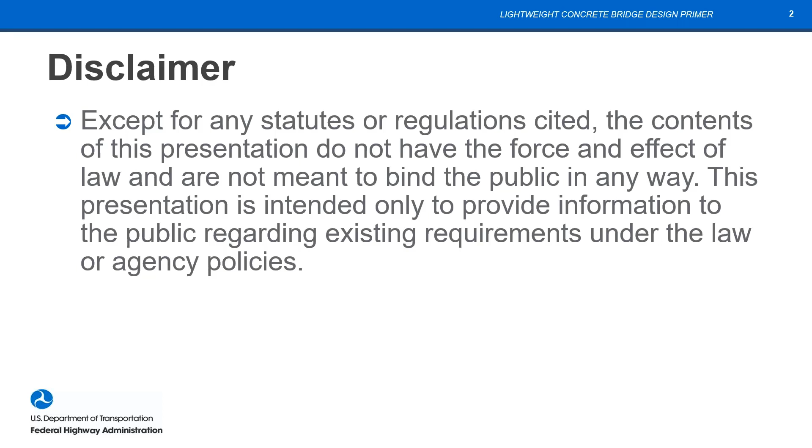Now I'll begin with a brief introduction to lightweight aggregate and lightweight concrete. Structural lightweight aggregate has been manufactured commercially in the United States since 1920. It started out a few years earlier than that, when a patent was obtained for it. So it's not a new material, though lots of us think of it as a new material.

They immediately began using lightweight aggregate as it became available to make structural lightweight concrete, and it was used in bridges. An early application was the San Francisco-Oakland Bay Bridge. The upper deck of that suspension bridge was lightweight concrete, and I'll talk more about that in a few minutes.

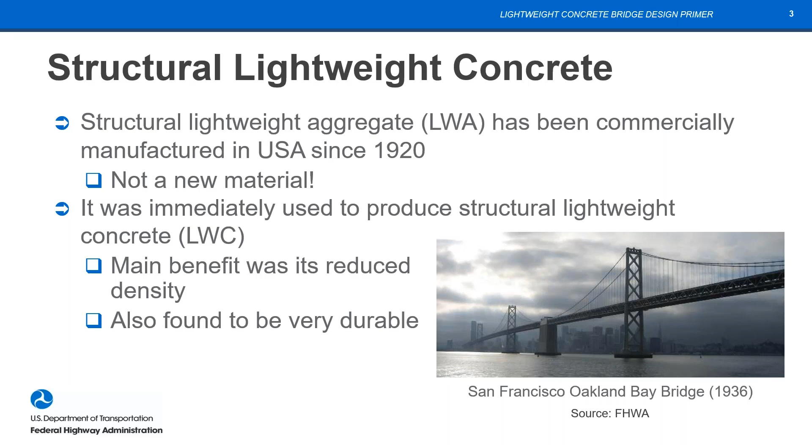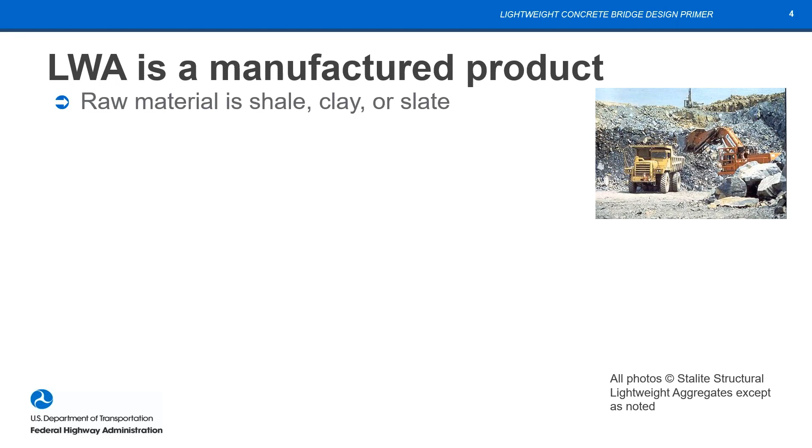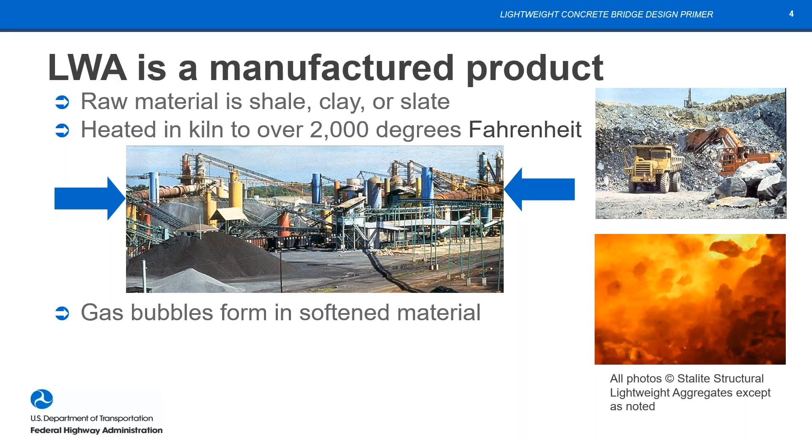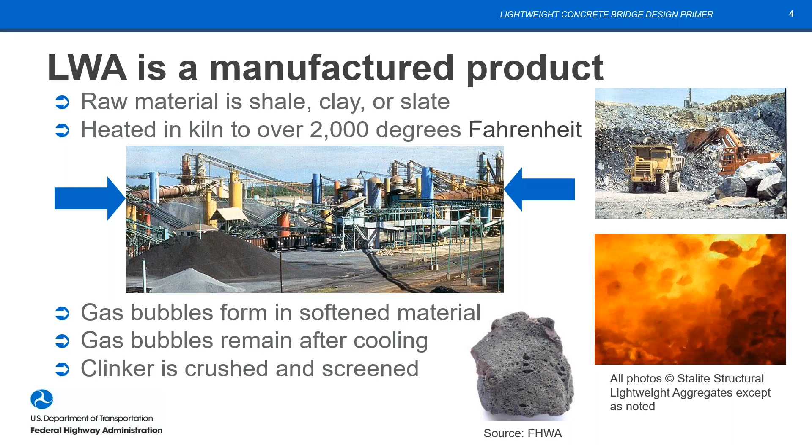In those kilns, the heat is fed in at the bottom, raw materials at the top. The material gets soft as it gets down to the bottom. We don't melt it, but it's softened. It turns red hot, and gas bubbles are evolved within that material. As the material comes out of the kiln, it's cooled, the gas bubbles remain, and the clinker is then crushed and screened. There are a few other sources of lightweight aggregate available, but my discussion is limited to lightweight aggregates produced using this method, using rotary kilns.

So just about everybody listening to this is probably closer to a lightweight aggregate source than these folks were. A number of years ago, FHWA recognized there was promise in using lightweight concrete for bridges. They felt it could improve the economy and durability of bridges. So one of the strategies they came up with to advance the use of lightweight concrete was to develop a lightweight concrete bridge design primer.

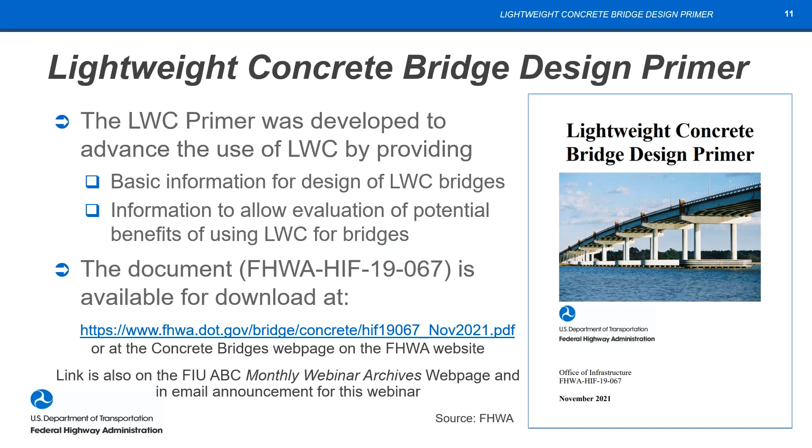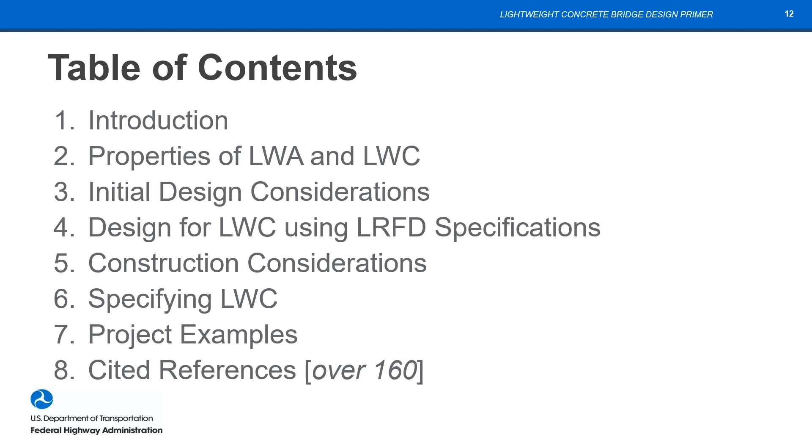As we get into what is lightweight concrete and lightweight aggregate, this is from chapter 1 of the primer. Lightweight concrete is defined in the LRFD. The definition is simply a concrete mixture that contains lightweight aggregate, and it has an equilibrium density not exceeding 135 pounds a cubic foot.

The term equilibrium density is maybe not familiar to some folks. The definition in ASTM is that it's the density of structural lightweight concrete after exposure to relative humidity of 50% and a temperature of 23 degrees C, room temperature, for a period of time sufficient to reach constant mass. What it's talking about is that lightweight concrete typically has some excess water in it because of the water that had been absorbed into the aggregate before batching, and some of that moisture isn't tied up in hydration products, and as a result can move out of the concrete.

So at any rate, the term equilibrium density is similar to one that you may have heard about previously if you've had any exposure to lightweight concrete, and that's air dry density. But that term isn't used any longer, and it's not defined in any specifications. So we are moving away entirely from using that term, air dry density, and just use equilibrium density.

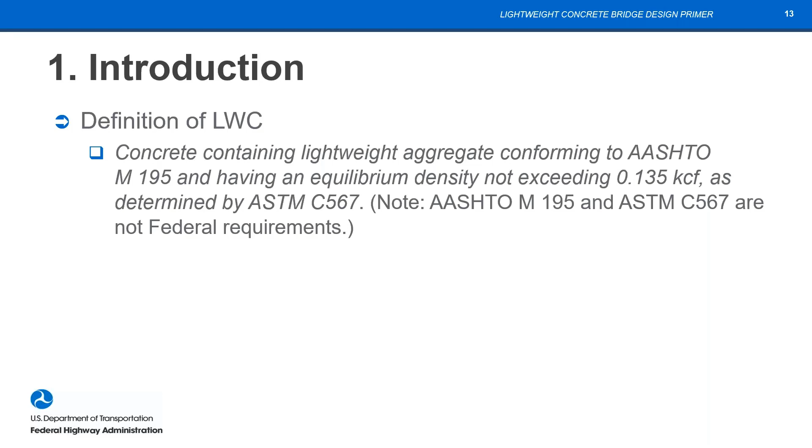You may note that density and unit weight are sort of used interchangeably. That's not quite accurate, but that's the way it is in the specifications.

So just to reiterate, lightweight concrete's not a new material. It's been in the AASHTO design specs since at least 1969. That's the oldest version that I had on my shelf here.

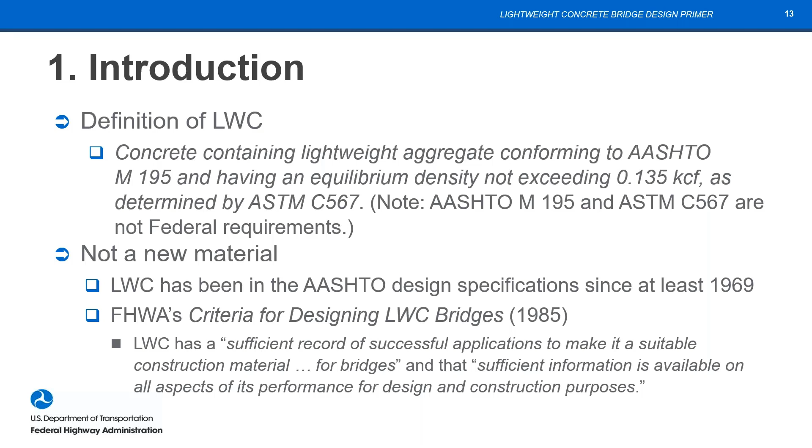And it's interesting to note that FHWA actually had a study back in 1985 that was performed by T.Y. Lin International, and they conclude in that study that lightweight concrete has a record of successful applications even back in 1985 to make it suitable for use in bridges. So that's just to help us understand the context, that it's been around for a good while and it has a lot of performance data that's available.

So what are the benefits for using lightweight concrete? Here's a list of structural benefits. Many of them have to do with the design efficiency for the superstructure and the supporting elements. It's especially true for seismic locations where reducing the load or the weight of the superstructure is going to significantly reduce foundation loads. Other benefits related to handling and transportation and erection where piece weights can be reduced.

And that's something that we see, that would be ABC. Then the last bullet here is an important thing for ABC projects oftentimes, where if you're just replacing a superstructure, you could go back in and reuse the substructure. Things will move much more quickly.

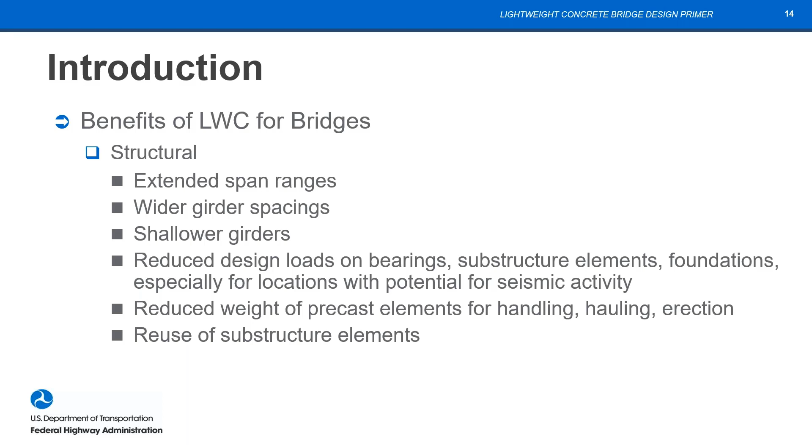There was an FIU ABC webinar back in March of 2019 on an FHWA document about substructure reuse. Then 2 months later, in May 2019, there was a presentation on the Patapsco River Flats superstructure replacement project where they reused the substructure using an all lightweight concrete deck in that case. And then the Skagit River Bridge is another example, which I'll talk about more details in a minute. There was a webinar in October of 2013 on that project.

So here I'm highlighting some topics with ABC and then expanding one here. Prefabricated bridge elements and systems is what we often think about for ABC. And what lightweight concrete can do is to reduce the weight of the precast elements, both for handling, for hauling, for erection.

We can use precast or pre-decked modular units where the deck is cast on the girders off-site, and then the whole span with deck is brought in and placed. We'll talk about a project like that later.

And then even precast substructure units, which are oftentimes very heavy, can be made out of the lightweight concrete. One problem with precast substructure units is that oftentimes they may weigh as much as a long girder, but they're typically a whole lot shorter. So that can really pose some significant problems when you're transporting precast substructure units and meet load rating requirements on existing structures. The final bullet, again, is highlighted just since it is an important ABC strategy.

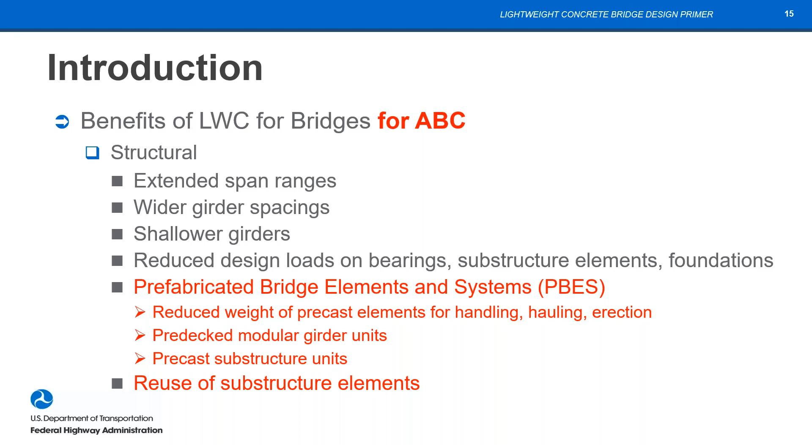What about other benefits? Interestingly enough, lightweight concrete has a durability benefit. It doesn't seem to make sense that using a porous aggregate in concrete would actually improve rather than degrade the durability of concrete, but that's what experience and testing has demonstrated.

The pores in the aggregate that make it lighter actually allow the aggregate to absorb water prior to mixing, and then that is made available within the concrete after setting in order to cure the concrete from within. This is known as internal curing.

This feature really provides significant benefits of reduced shrinkage, reduced cracking, and reduced permeability. So it's a significant benefit to using lightweight concrete, or just internal curing, which we'll talk about later too.

There's what's called elastic compatibility. That is, the modulus of elasticity of the aggregate is lower, which is closer to that of the paste, and it reduces micro cracking. We also have reduced coefficient of thermal expansion, and when combined with a reduced modulus of elasticity, that really does a lot to reduce cracking, especially early age cracking due to restrained shrinkage, but also thermal effects, which are significant, especially in decks that are restrained by girders.

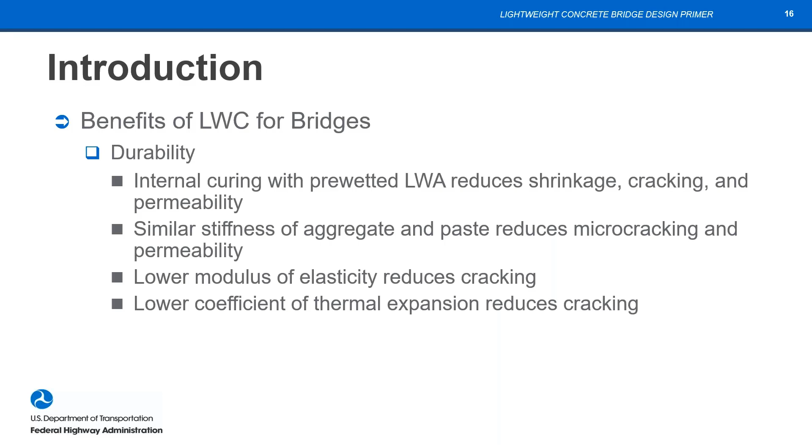There are, however, perceived disadvantages of lightweight concrete in bridges, and you can see them listed here. Probably the main one is the cost of lightweight aggregate. Many people are very concerned about that, but the fact that many successful projects have been completed using lightweight concrete indicates that the increased cost alone can't deter its use. We shouldn't just look at that; overall project costs have to be considered.

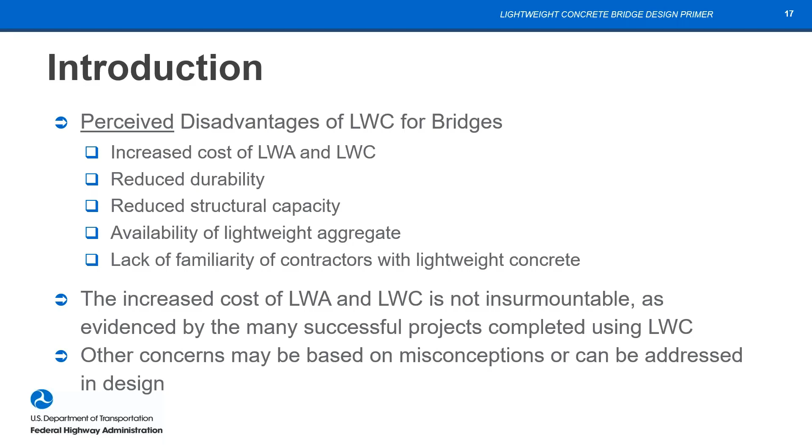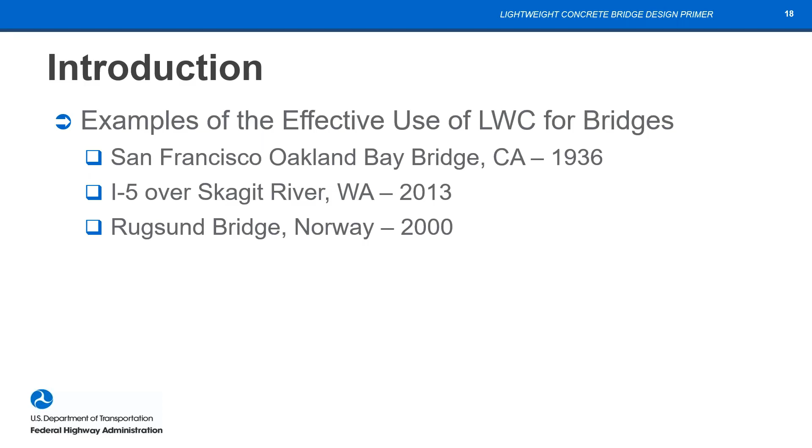Other concerns can also be addressed in design or with test data. I'm going to briefly touch on three examples of bridges where lightweight concrete has been used, just to illustrate some of those benefits.

The first one is one we already mentioned, the San Francisco-Oakland Bay Bridge. It was completed back in 1936 using all lightweight concrete for the upper deck, the one that the cars ran on initially. That was a 95 pound per cubic foot concrete.

There's an article out there, I think in ASCE, that says they saved $3 million by using that all-lightweight concrete deck out of the original $40 million cost. Later on, they reconfigured the lower deck to also be open for highway traffic, and they also used lightweight concrete there.

As I understand it, both of those decks are still in service. They have had wearing surfaces on them, but they're still there since 1936. The benefit's pretty obvious with that reduction in cost, near a 7.5% reduction.

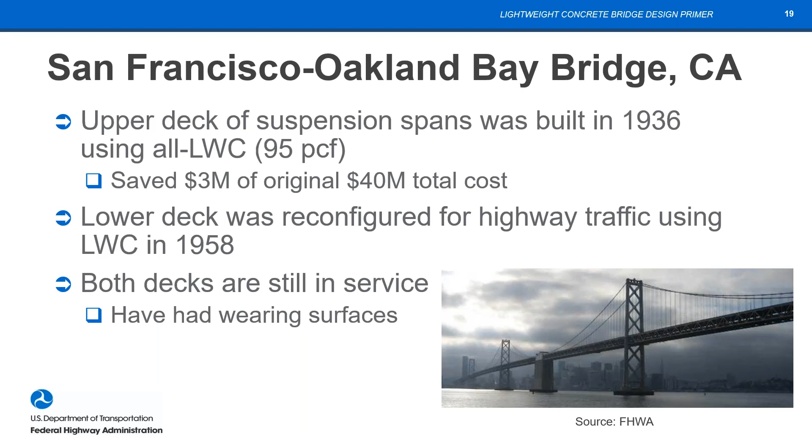Now we're coming back to the I-5 over the Skagit River Bridge in Washington State. There was an overheight vehicle that struck a span of the truss on that bridge, dropping it into the river. When Washington State DOT put that back out for bid, they had a caveat that if the total weight of the replacement span was less than essentially the weight of the existing span, the design-build team did not have to do a seismic analysis and retrofit on the piers.

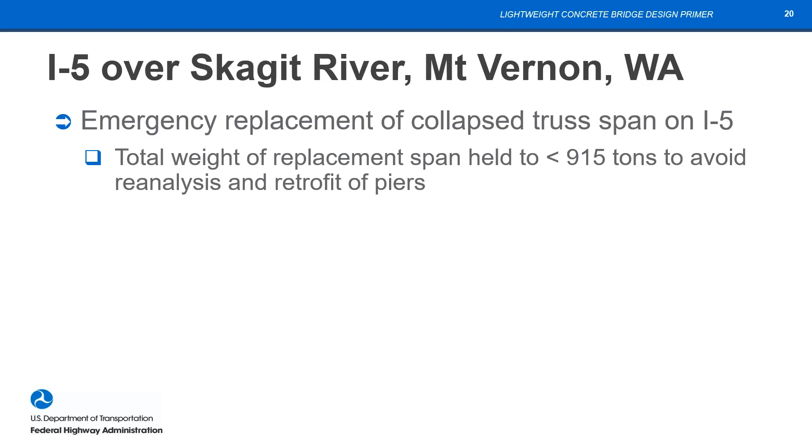So that was a pretty good reason to try to keep the weight of the structure down. The team that won, led by WSP on the engineering side, came up with the use of a sand lightweight concrete deck girder system. That was the first time lightweight concrete girders had been used by Washington State DOT.

The design compressive strength was 9 KSI as specified, but the actual design compressive strength, figured from the statistics of compressive strengths in production of those girders, came out to be 10.6 KSI. So it was a high strength mix. It worked well for this, and those were about 162 foot long girders.

This same lightweight mix has been used on several other projects—we'll see another one in a few minutes. These girders were assembled and then slid into place with a lateral slide over a weekend in order to open this bridge back up and remove the temporary bridge that was there.

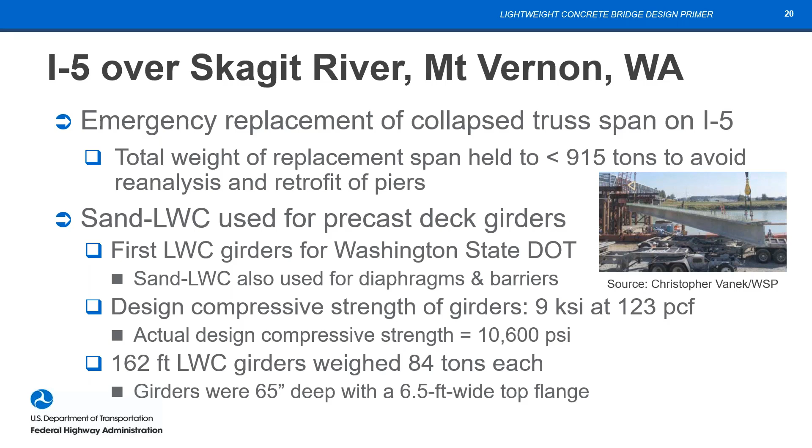There was an FIU ABC monthly webinar on this project, back in October of 2013. And just as an example of the costs here, I think this is very telling. This is a table out of the primer, and it gives the relative cost—that is, the cost of the lightweight quantity to the cost of the normal weight quantity—for each of these different items. I'll click through each of them.

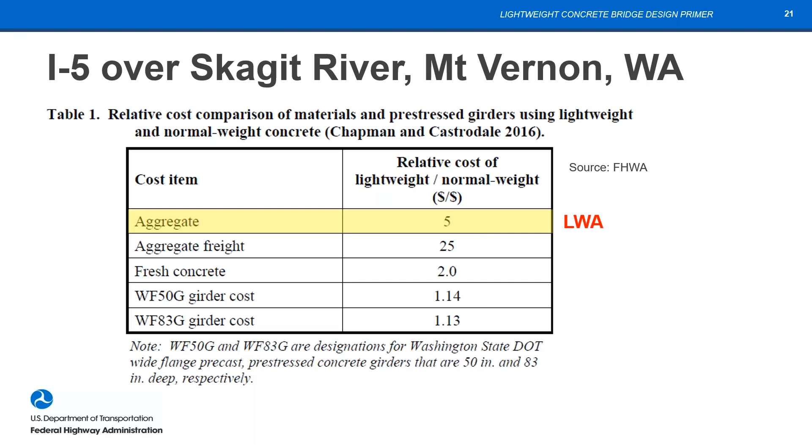The first one is aggregate. So the cost of the lightweight aggregate itself was 5 times what this plant would pay for their normal weight aggregate.

The freight was 25 times the cost that they had for freight for the normal weight, and that's because it was being brought in some cases by truck, but typically by rail from North Carolina all the way to Tacoma, Washington.

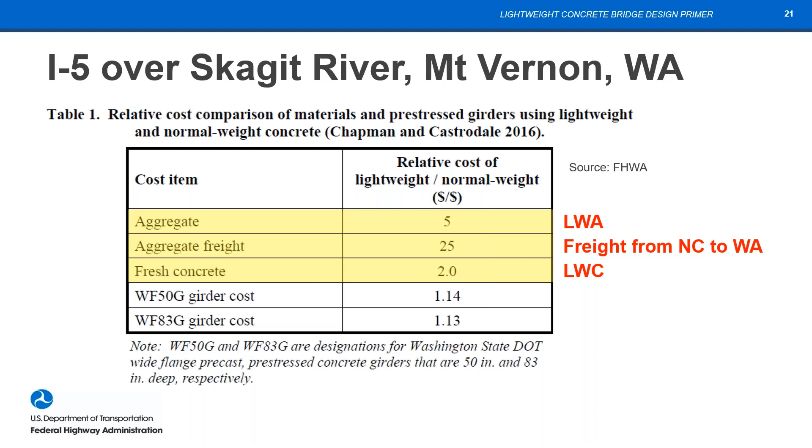However, when you put all of that into the fresh concrete, the batch concrete was only 2 times more than the normal weight. Now that's still significant. But by the time you get down to the girders themselves, the price per foot of girder was less than 15% more than for a normal weight girder.

I think that's very important to remember, that even though the cost of the lightweight aggregate and freight were so much higher than normal weight, the cost of the completed girders was only 15% more.

That's very important, and also the reason the designers could see this is they looked at the whole project and could see what the benefits from the whole project were going to be, especially since they could avoid the seismic reanalysis and retrofitting of those piers.

That's important to bear in mind. And have to remember too that this lightweight aggregate was shipped from North Carolina, but whether it was shipped from North Carolina or Texas or New York, Utah, California, it shows that even though the cost of the aggregate and freight can be a lot more, it can still make sense to use it.

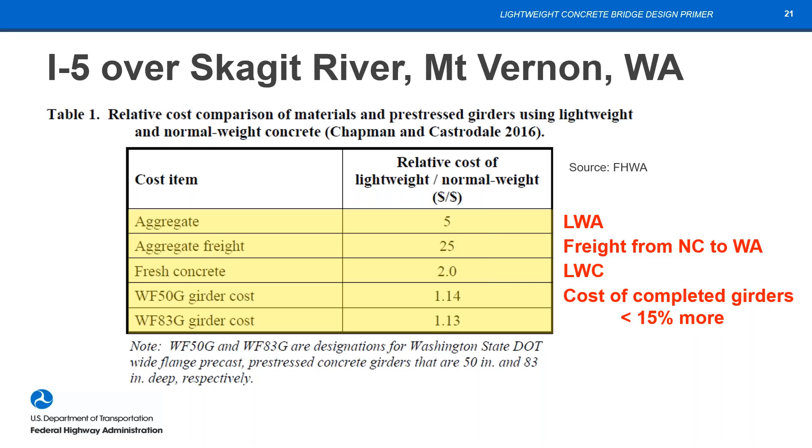Another bridge is one that's not in the US. This is one up in Norway. It's a long span cast-in-place segmental concrete box girder over a deep fjord.

It was designed in normal weight, and then a peer review team said you ought to come up with a lightweight concrete design. So the lightweight concrete design had all these features that you see here. The main span was increased by 10%.

This is a project that, unfortunately, I don't have a photo of here, but it's over a fjord. So by increasing the main span by 10%, you're moving the foundations up out of the deep water. So that was very significant.

The bid for the lightweight design came in actually 15% less than for the normal weight design. And it turns out that once again, in this case, the contractor wanted to pump lightweight concrete, and the Norwegian DOT wouldn't allow pumping of the local lightweight aggregate. So the lightweight aggregate was shipped in from the United States to this project, and the bid was still 15% less than the normal weight design, because of the changes to the design that were possible due to the lightweight concrete.

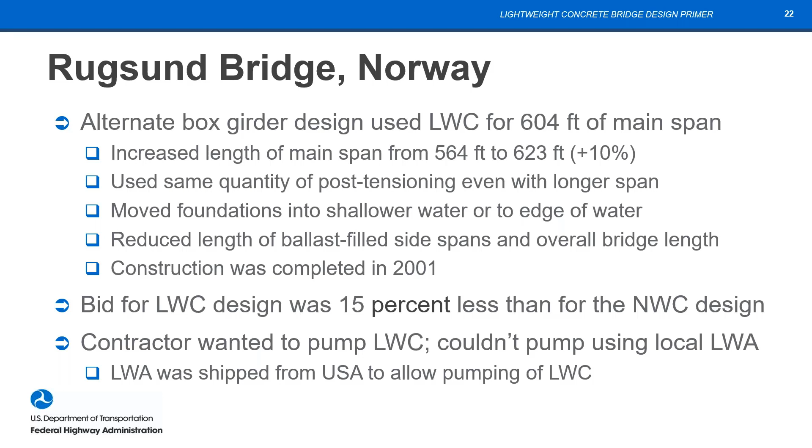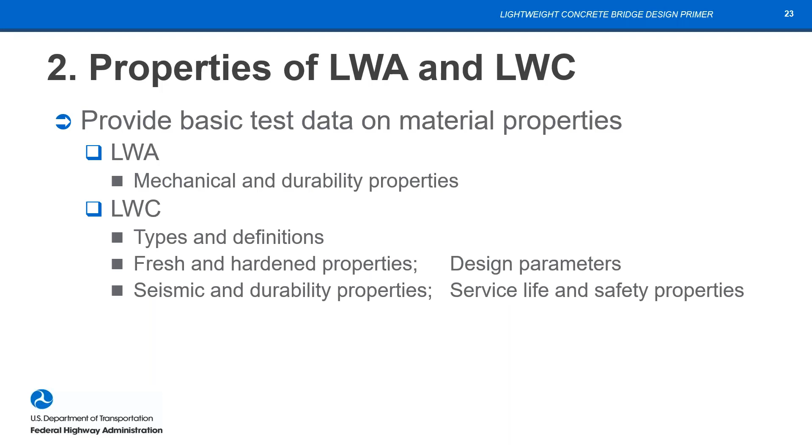So now we're going to move on to chapter 2 and get into a brief discussion of the properties of lightweight aggregate and lightweight concrete. We'll look at some of the properties of lightweight aggregate, then lightweight concrete, and finally we'll have 2 slides about internal curing.

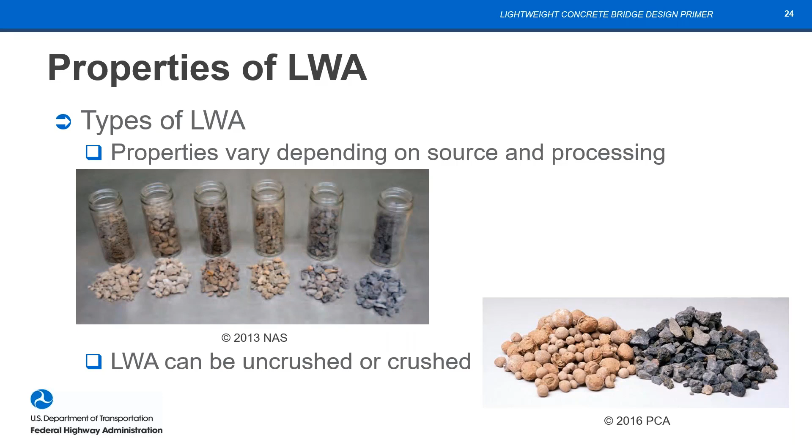There are a number of different sources of lightweight aggregate. There are 3 basic types: shale, clay, and slate, like in the name of the institute. Most of them are crushed. Some are uncrushed and are pellet shaped, like in that picture. There are gradations that exist, both AASHTO and ASTM specs that specify the gradations for these aggregates, both coarse aggregates as shown here, and also fine aggregates that are available.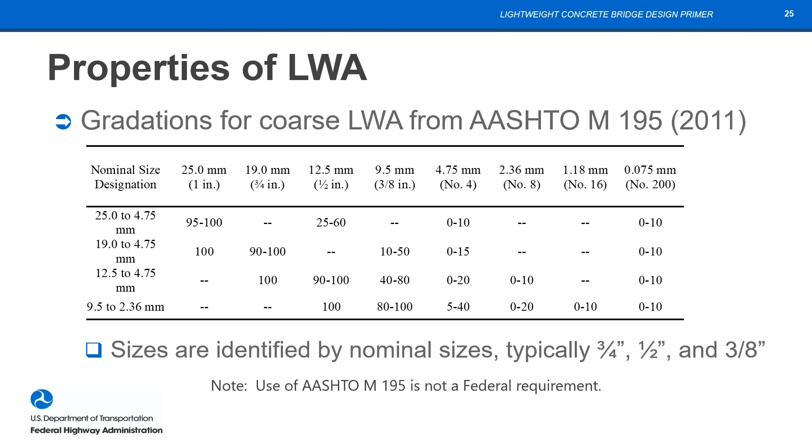Absorption is an important property for lightweight aggregate because lightweight aggregate is expanded and has pores in it. Those pores or holes reduce the density of the material. The absorption typically ranges somewhere from 5% to 25% by mass after soaking for 24 hours.

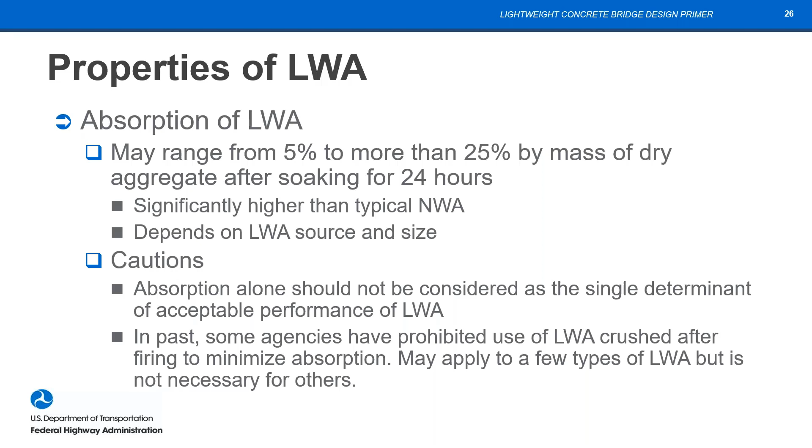It does depend on different lightweight sources and size. But it's important that absorption alone should not be considered as the single determinant for acceptable performance. That is, an aggregate with a low absorption is not necessarily going to give you better performance in some applications than an aggregate with a higher absorption. In some cases, that's been written into specifications, but that's just something to be aware of.

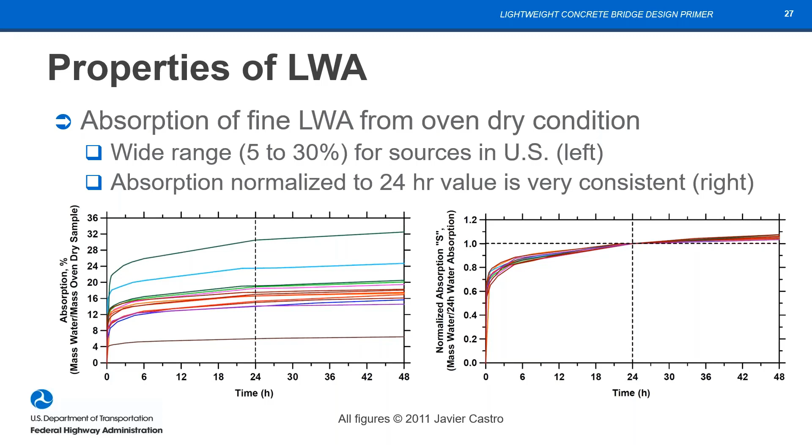Here's some data just for an example. This is absorption data, showing a number of different sources — pretty much all the sources in the US for lightweight aggregate are on this plot. You can see that at 48 hours, on the right side, the absorptions range from a little over 6% all the way up to a little over 32%. But it's an interesting fact that if you normalize all this data to the 24-hour value, the behavior of all these different aggregates is really very similar. They gain absorption very quickly, and then it flattens out and continues at a much slower rate.

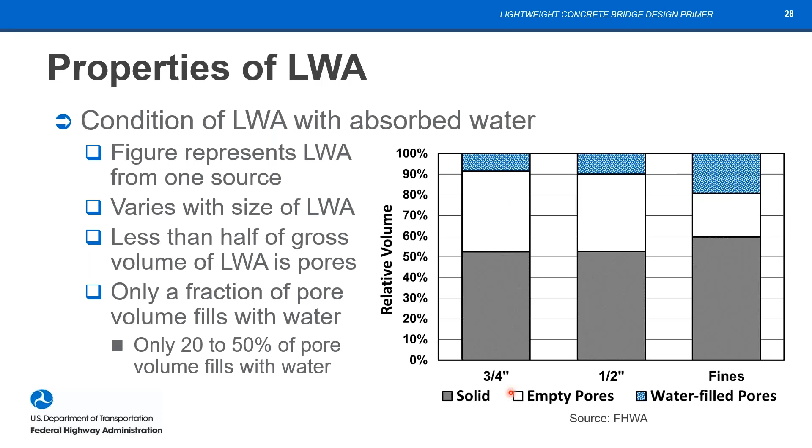The water can only get into a small fraction—in this case, less than 10% of the aggregate—so it's filling only about 20% of the pores. That's important to bear in mind. It does vary between the different gradations; you actually fill more of the pores in the fine aggregates than in the coarse aggregates. So much of the void space remains unfilled—we never saturate those aggregates and fill up all those pores.

What about the durability of lightweight? A lot of us think, can a rock with voids or pores be made into a durable concrete?

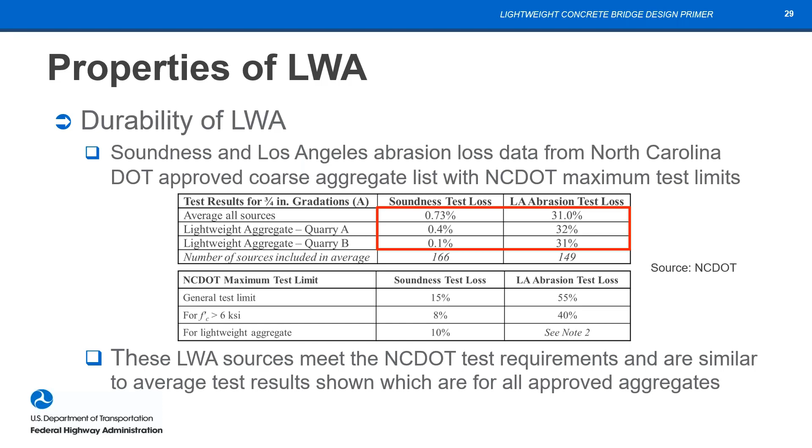They're well within the requirements down here at the bottom, which are the NC limits for those test methods. So while many people think lightweight aggregate isn't able to meet normal weight specs, indeed it can in some cases. My recommendation is that, except where it's not possible, you stick to the same requirements.

When we get to lightweight concrete, there are some different definitions. We have all-lightweight concrete, where all of the aggregate in the concrete is lightweight. Sand-lightweight concrete is a mixture with coarse lightweight aggregate and normal weight fines. And specified density is any kind of blend of normal and lightweight aggregates to obtain some specified density.

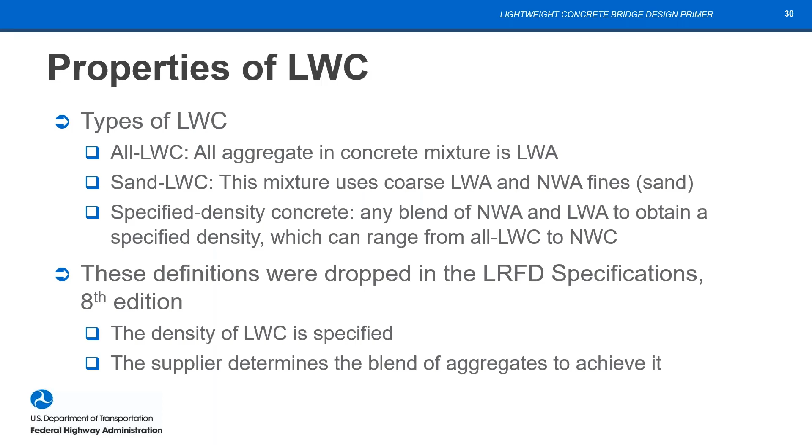These definitions aren't in the LRFD specs anymore—they used to be, at least the first two were. Now we simply specify the density of the concrete, and the supplier defines how you mix that up, how you combine aggregates.

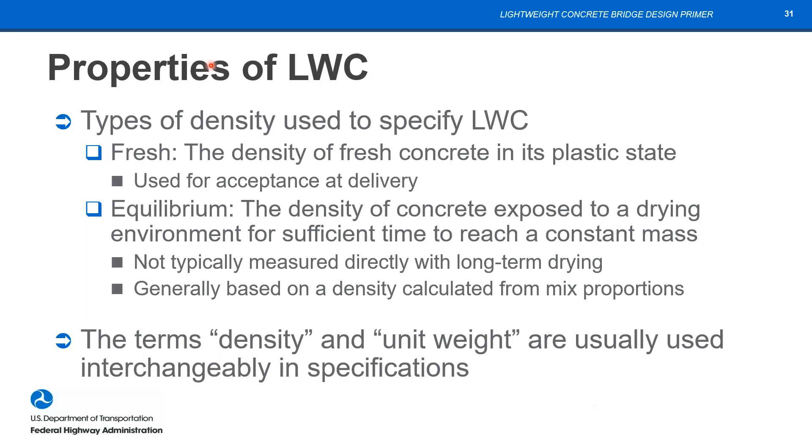What kinds of densities do we have? A fresh or plastic density is important because we use that for acceptance at delivery. An equilibrium density is what dries out, and this would essentially be your service or long-term density that you'd use for dead loads at the service condition. Might just note again that density and unit weight are oftentimes used interchangeably in the specs.

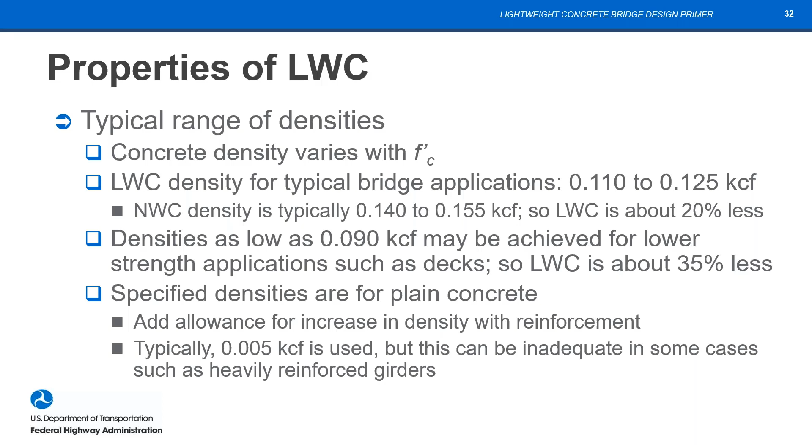Typical range of densities is given in the primer. For lightweight concrete, typically from 110 to 125. You can get lower, all the way down to maybe 90 pounds per cubic foot, maybe 100 pounds per cubic foot. The specified densities are, as they are for normal weight or plain concrete, so you do have to add an allowance for reinforcement when computing dead loads.

Hardened mechanical properties for lightweight concrete are important. A lot of people feel like lightweight concrete has reduced mechanical properties compared to normal weight, and that's really only true specifically for the modulus of elasticity.

That's the most significant one, but many of the others are essentially similar. In some cases, lightweight concrete can even have better properties than normal weight. There's a lot of information in the primer that you can learn more about.

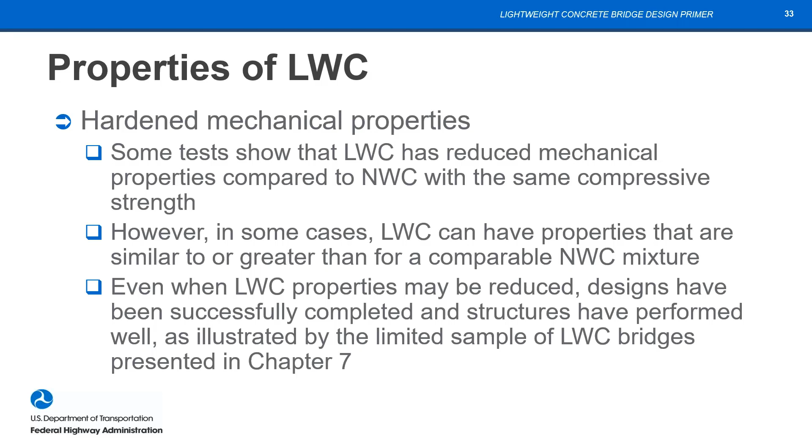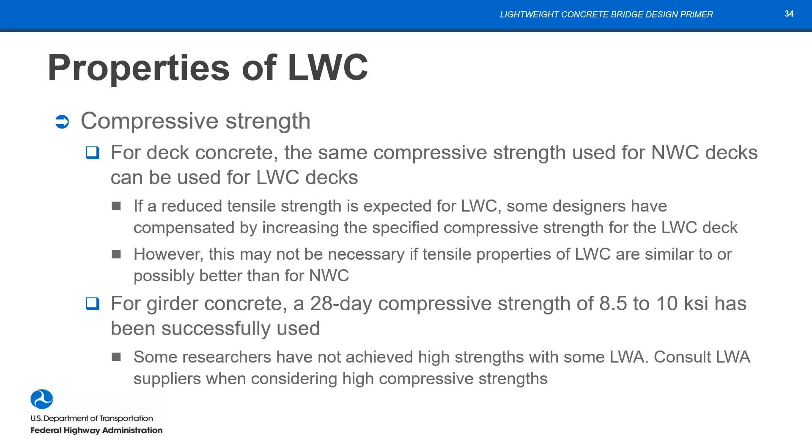For compressive strengths, you should check with available lightweight aggregate sources to find out what's a reasonable upper strength, and in some cases you can make some compensation as indicated here. For decks, we can easily achieve typical deck concrete strengths. For girders, we can probably get up into the 8.5 KSI range, and some aggregates can get up to 10 KSI. That's been shown in a number of different projects.

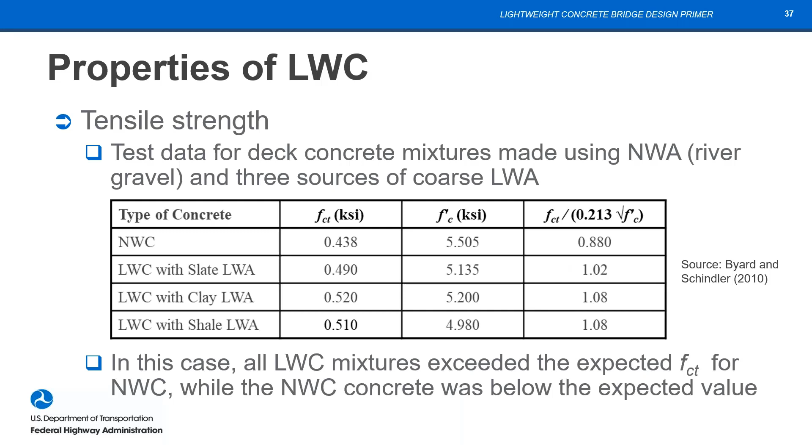Tensile strength - oftentimes people think the tensile strength of lightweight will be reduced compared to normal weight. There was a study done at Auburn University, and this is data from that study. The splitting tensile strength is shown here, the compressive strength here, and the ratio of splitting to the expected splitting tensile strength for normal weight concrete is shown in this column. We actually find that all the lightweight concretes have a ratio greater than 1, where the normal weight, which was a river gravel, had reduced tensile strength. But we don't make any modifications for that. We typically do modify these sand lightweight mixes in some aspects, so that's just interesting to note.

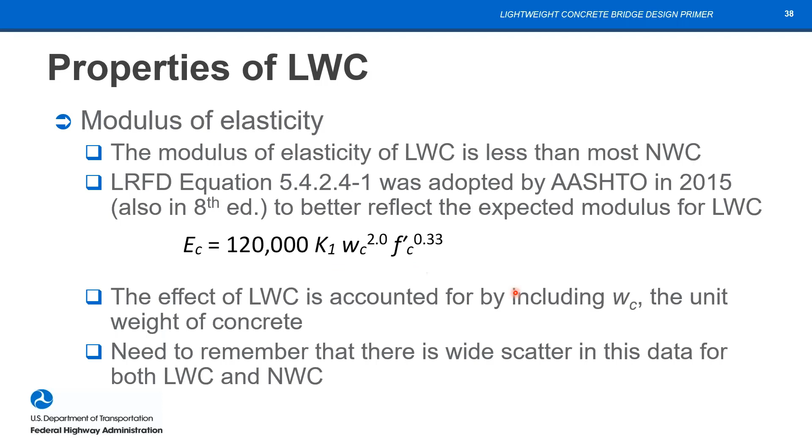As far as the modulus of elasticity, there's a new equation. There is a reduction of modulus with the reduced density, and that's included here with the unit weight being in the calculation for modulus, and that's been in specs. This is a new equation, but the old equation also had the unit weight, and that's been done since the 60s - we've been recognizing that reduction in modulus. There is an awful lot of scatter in that data.

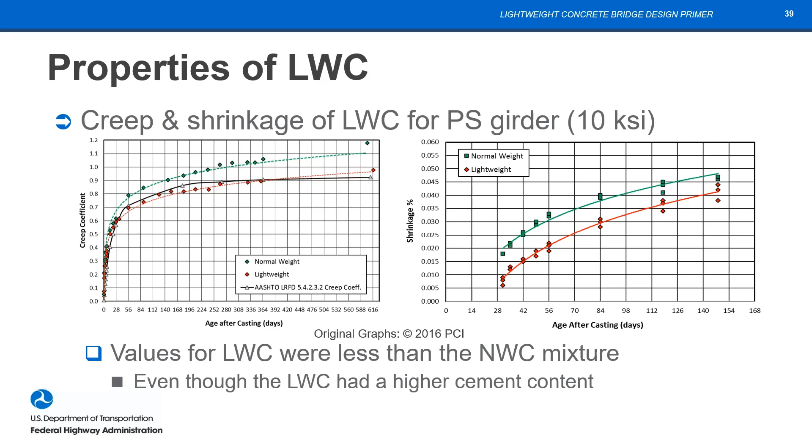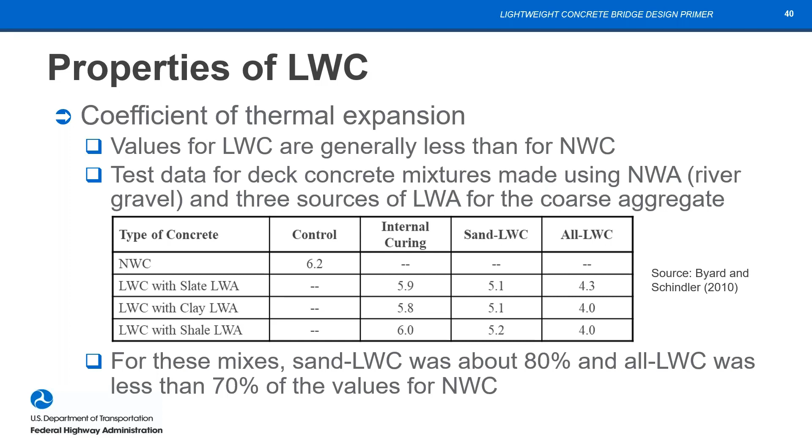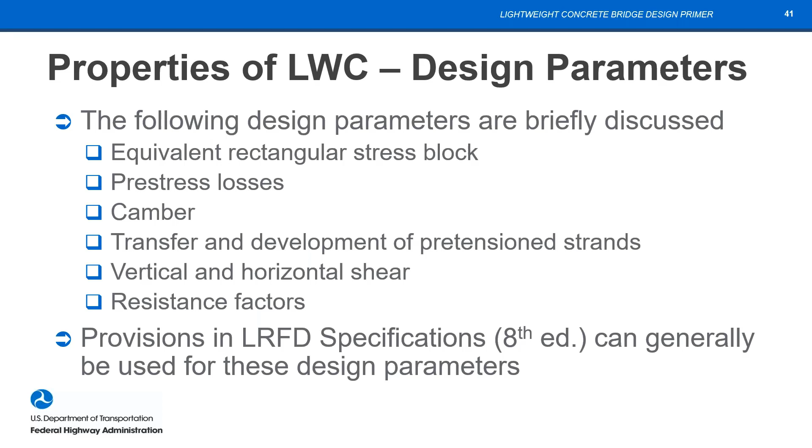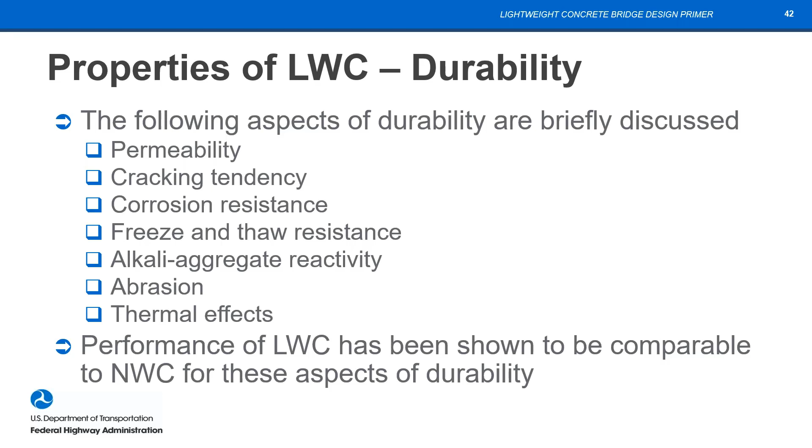There's more discussion following in chapter 2 about what properties we use for design, and each of those different types of properties that we use are discussed. There are provisions in the 8th edition - they've been revised in some cases now, but we do have all of that available. There are properties for lightweight concrete; those are durability, and those are all discussed as well. Background for that is given, and I can't discuss it further - short on time today.

Internal curing is discussed slightly, and what we typically do when we talk about an internal curing mix is something that FHWA now has in their Every Day Counts 6 program - they've labeled it EPIC 2. That's internal curing, where you take some fraction of the sand out of a conventional mixture and replace it with pre-wetted lightweight aggregate, and that pre-wetted lightweight aggregate then provides internal curing and does have a significant improvement to the properties, even though it's only a fraction of the sand that's being replaced.

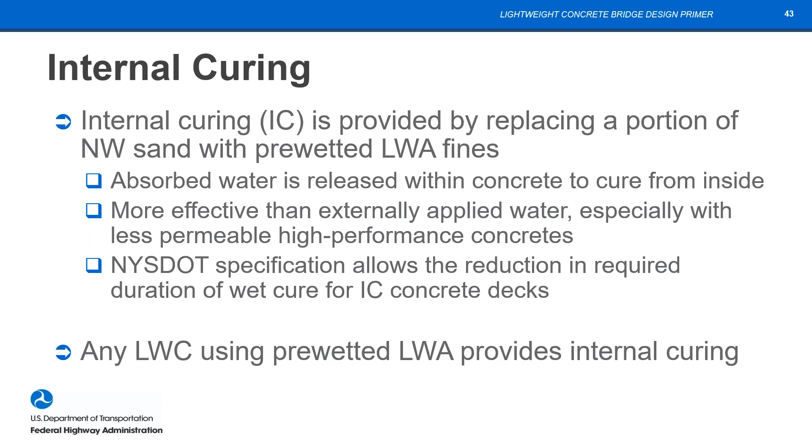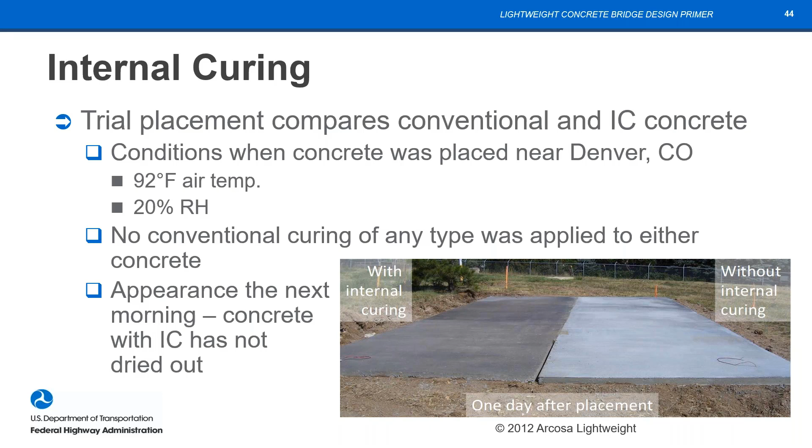Here's a very graphic illustration of that. This was a trial placement for a big water tank, and this photograph shows the condition of those trial placements the next morning, after an internally cured mix was placed right next to a conventional mix. No curing compound was placed on either of the concretes. The next morning, the internally cured concrete was still moist on the surface, where the surface of the non-internally cured mixture had dried out. So that's a very graphic illustration of the benefits of internal curing.

We're now going to hit the next three chapters quickly.

Chapter 3 gives initial design considerations. So what do you need to use for design? This steps through the different points that we need for different applications and stuff. I think this is a very important chapter to have.

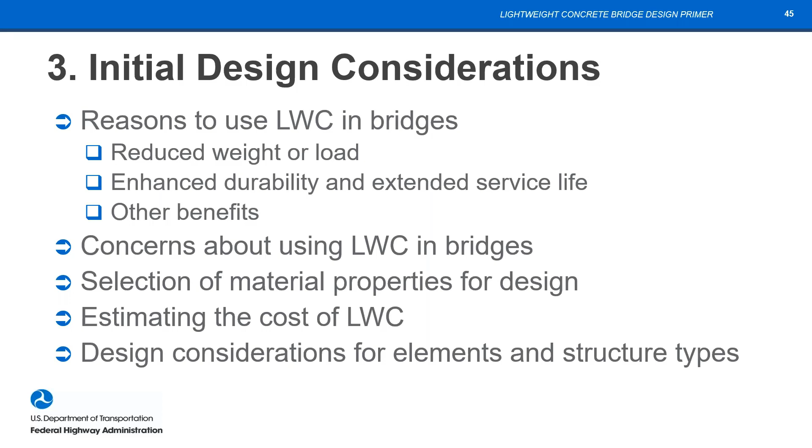Chapter 4 goes into design aspects of using lightweight concrete. There were some changes that were adopted in 2014 and 15. Those are discussed, and then we go through some other sections. I'm getting short on time, so I'm going to have to turn on the afterburners.

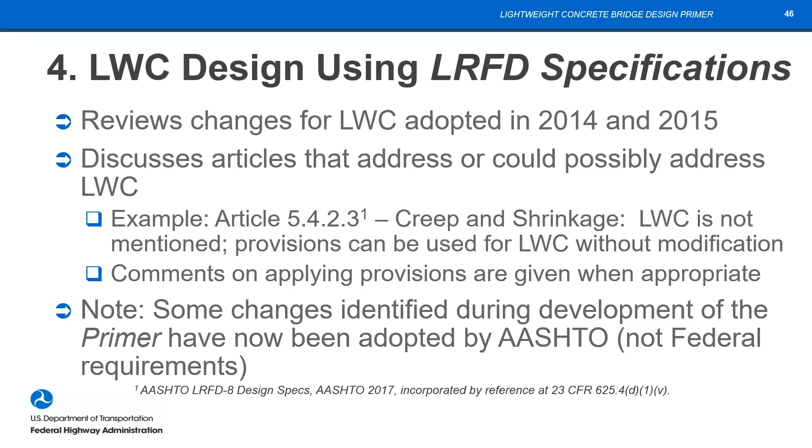Here are a couple of highlights of some of those revisions to the specifications that were made in 2014 and 15. The designer now specifies the unit weight. We always did that, but then that is used to define the density modification factor. So it depends on the actual unit weight specified rather than just an all lightweight or a sand lightweight designation.

Another thing is that the resistance factor for shear used to be 0.70, where it was 0.9 for normal weight concrete, and now the shear resistance factor for lightweight is equal to that for normal weight at 0.9.

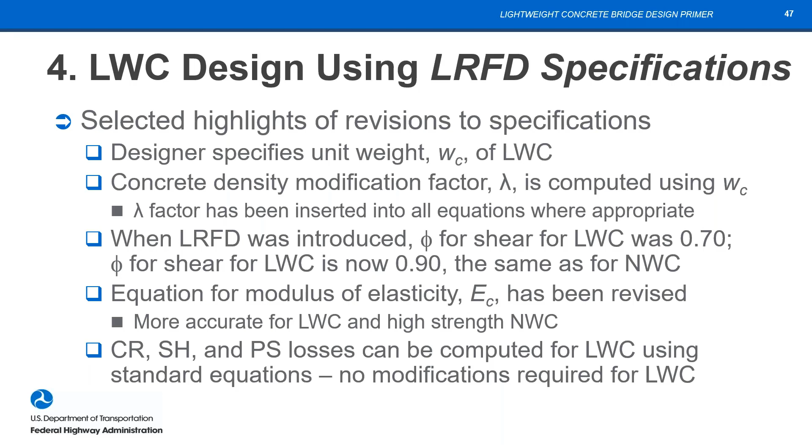There was a new modulus of elasticity equation, and then creep and shrinkage, pre-stress losses. It's been found by research that we can use the exact same values, equations that is, that are computed using the standard equations without modification when we're designing for lightweight concrete.

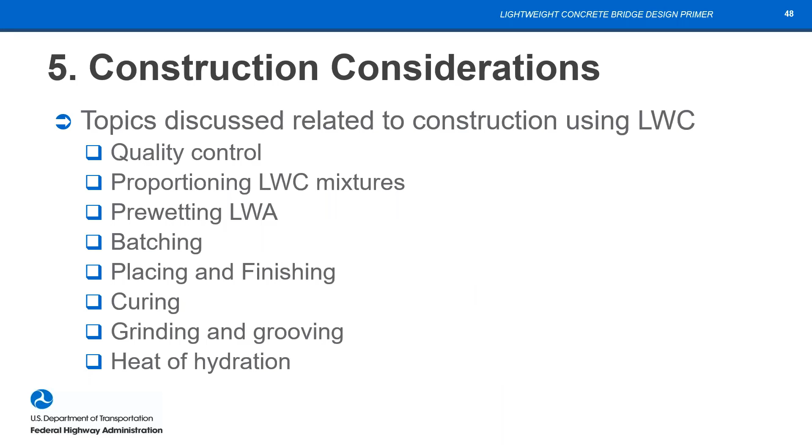As far as construction, there's some discussion of different things that people need to look at in order to get a successful project. Chapter 6 is about how to specify lightweight concrete. That's also very important in order to get a successful project.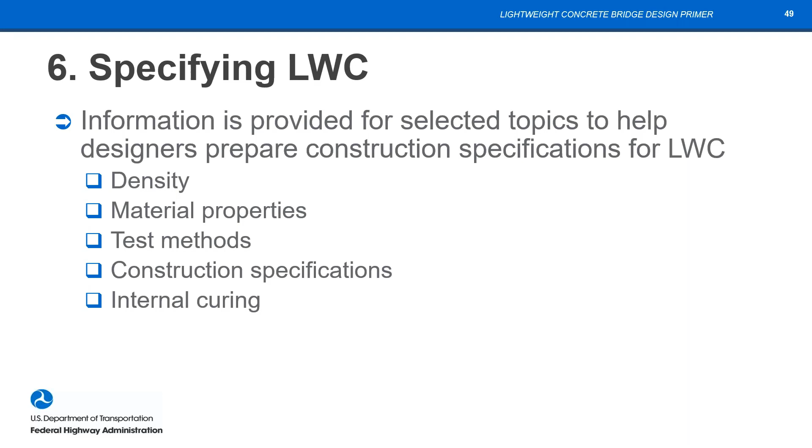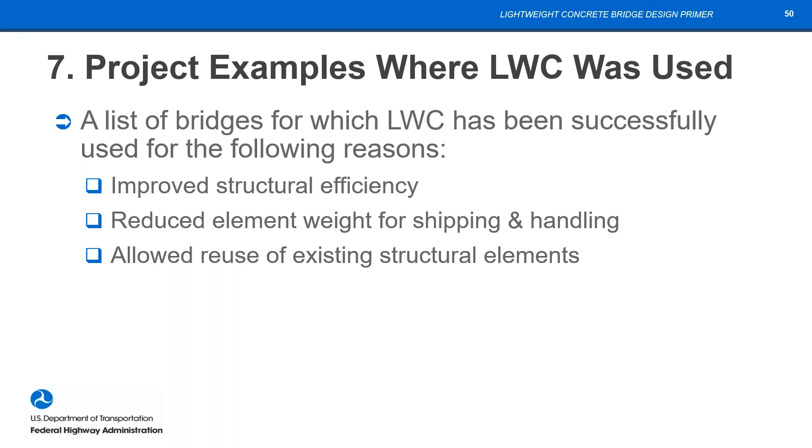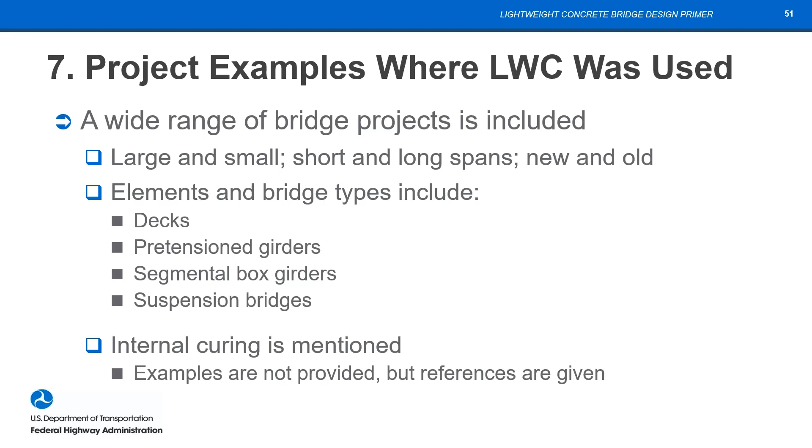And then we move into the project examples. There are 3 types of categories of projects that we had, and you can see them listed here. Also we had quite a range that we included there, for a range of bridge projects, large and small. Some of them were decks, girders, segmental bridges, suspension bridges. And there was no mention here about internal curing in the projects, but there are references.

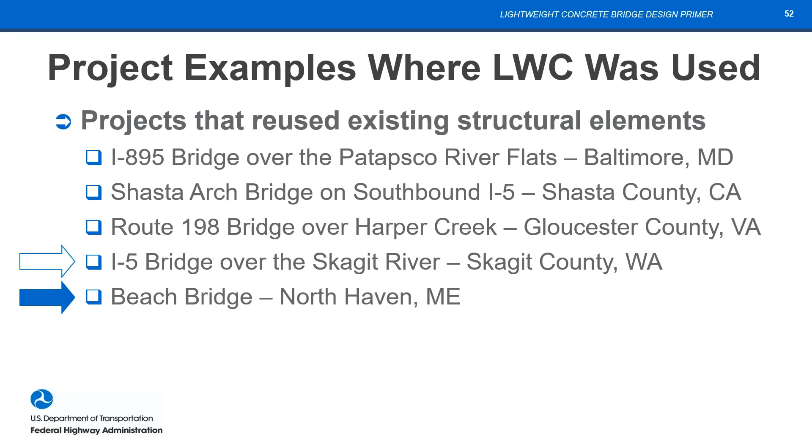A couple of projects I'm going to discuss. The beach bridge here in Maine: it was next D beams that were used to replace a small 2-span bridge on an island off the coast of Maine. It was the first use of sand lightweight for next beams, and it was a successful project.

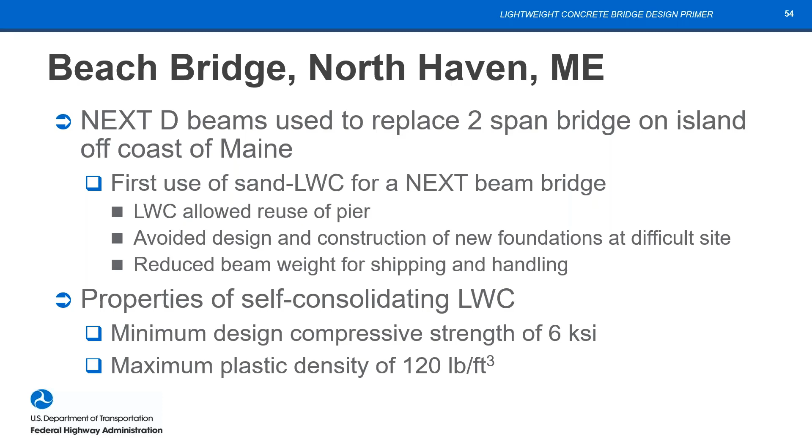They needed to use lightweight concrete to be able to reuse the pier. It avoided the design and construction of new foundations, which were pretty difficult at this site, and also, since it was an island off the coast, shipping and handling was significant, so reducing that beam weight was important.

The new deck on the approaches was cast offline and then slid into the old alignment, moving off the old bridge. So the foundations were able to be reused with that lightweight concrete deck.

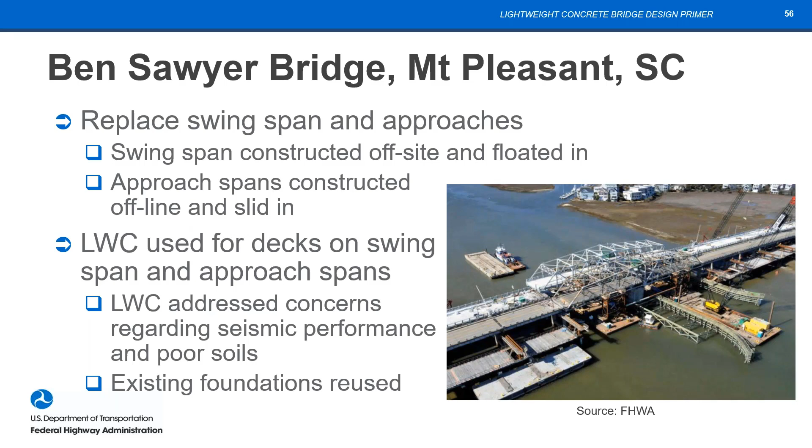A couple of other projects that we have here where improved structural efficiency was important. The Benicia Martinez Bridge outside of San Francisco is a major bridge with spans up to 201 meters or 658 feet, and the entire segmental box girder section there was lightweight concrete. This was completed in 2008. So the whole bridge, 6,500 feet of bridge, except for the pier segments, were lightweight concrete. That use of lightweight concrete greatly reduced the seismic forces and therefore the foundation size and cost.

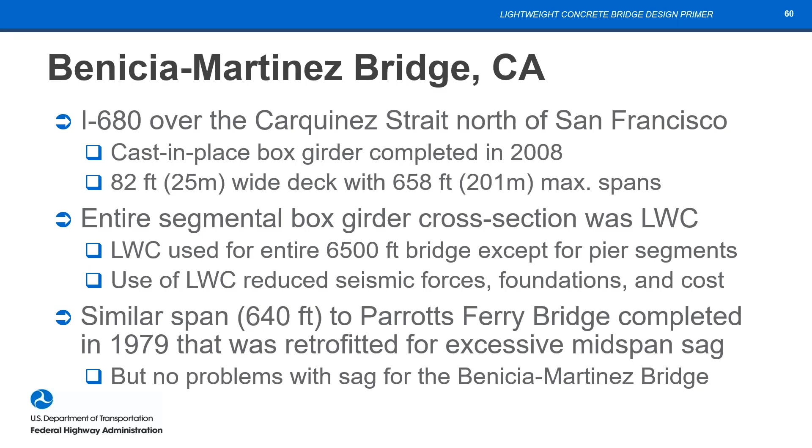There was a similar span, 640 feet, that was constructed way back in '79 in California, and it had to be retrofitted because of excessive mid-span sag. I can't go into the details of all that, but there was no problem with the Benicia Martinez Bridge with sag. So the creep and shrinkage were handled appropriately, and it wasn't excessive, and it was a successful project.

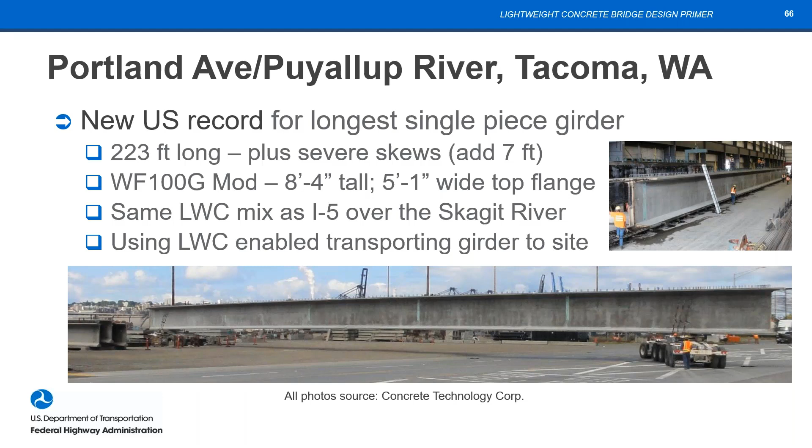This big girder used the same lightweight concrete mix as was used in the Skagit River, and they used the lightweight concrete in order to be able to build this thing and ship it, because they couldn't have shipped it otherwise, even though they're going about 7 miles or something to the site.

This is a project in Richmond, Virginia. It's 2 projects. One was early 2000s, and then one was later, in 2014 or so, where the deck is placed on steel girders and the whole unit is then replaced overnight, replacing a span at a time or half a span transversely. And the lightweight concrete was very significant in reducing the weight of those elements. Also, it made it more resilient for difficult mix and environmental conditions. And this deck is not covered.

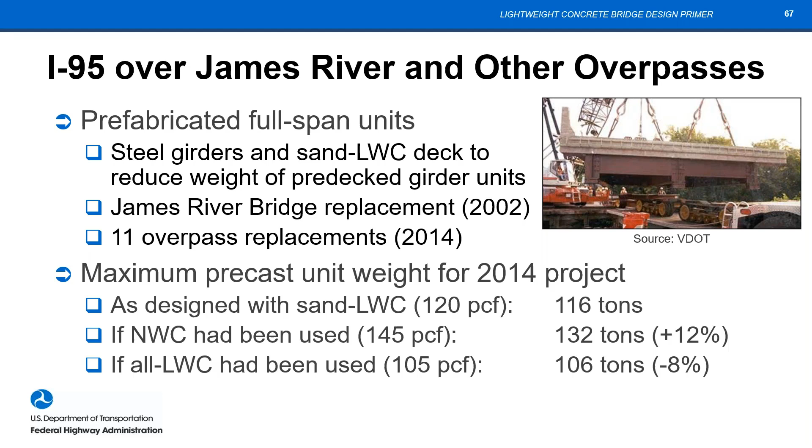The lightweight concrete deck is exposed and it's performing well. Last project is a big one, the biggest spliced girder span in the US right now, 325-foot main span, and lightweight concrete was used for the drop-in span. You can see those girders, they were actually put in pairs and lifted in pairs using strand jacks. And the lightweight concrete assisted in making that possible.